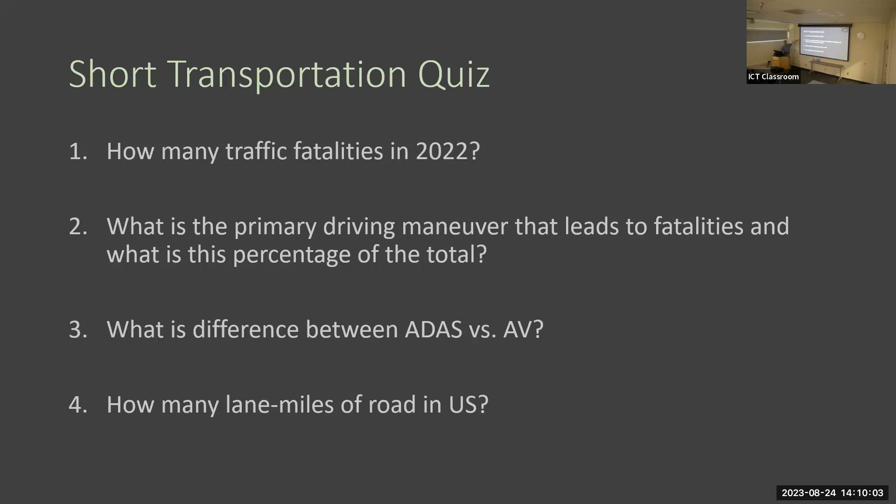And the final one, the traffic fatalities - there you go, almost 43,000 deaths per year. And the other shocking thing is 42% is in rural, non-urban areas. It's not just that there's a lot of people around - people are doing lane departures even in rural areas by themselves.

There's a big program with FHWA called Vision Zero. I thought we were down to 30,000 - yeah, it went down and it came back up. We're up, I'll show that statistic in a second, but it went down. So the funny part is, I'll hit on this right now: ever since we've had advanced driver assist systems, actually everything's gone up, more or less. And I'm not sure it's because of those things, but what's that tell you about driving behavior though?

Distraction, like cell phone use, is a big factor. How much does that play into it? Probably a pretty large percentage. Speed is also higher now.

So despite technology and FHWA's great vision, which I don't have a problem with, traffic deaths have actually gone up, even though they've spent a lot of money improving geometrics, shoulders, rumble strips, and roadside features. Yet we see fatalities moving upward, not downward.

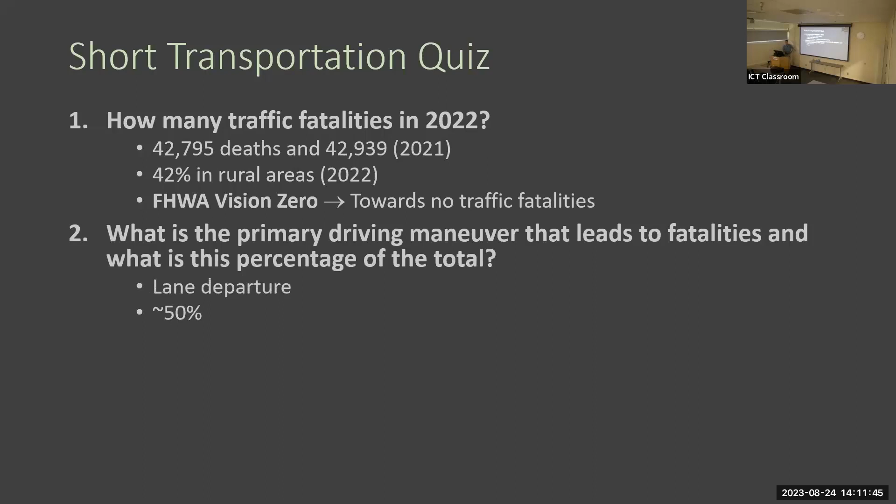We've already talked about that, and this is my definition, a subset of ADAS. Since 2011, we were down at 32,000, so things have just gone up, and we're about 20% above 2019 levels.

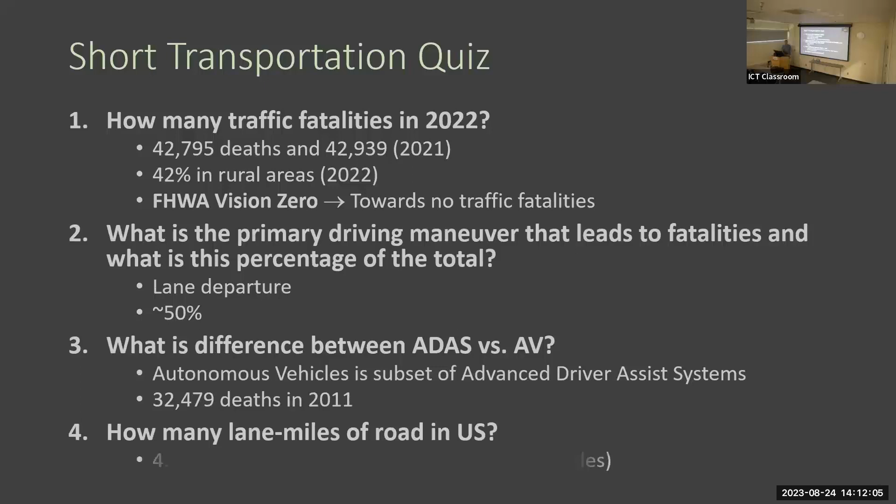Level 2 is available in a lot of cars you can buy now. We have a Subaru, which isn't a really expensive car, but you can pretty much get level 2 features on that—blind spot monitoring, adaptive cruise control, automated braking, object detection and braking. Those are all really nice. And then lane keeping is also in there. So these are what I would call ADAS systems, and there's more out there.

And then if you back up, you have the rear view camera, front facing camera, and cross traffic detection as well. I've kind of talked about these already, so I'm not going to go into it again.

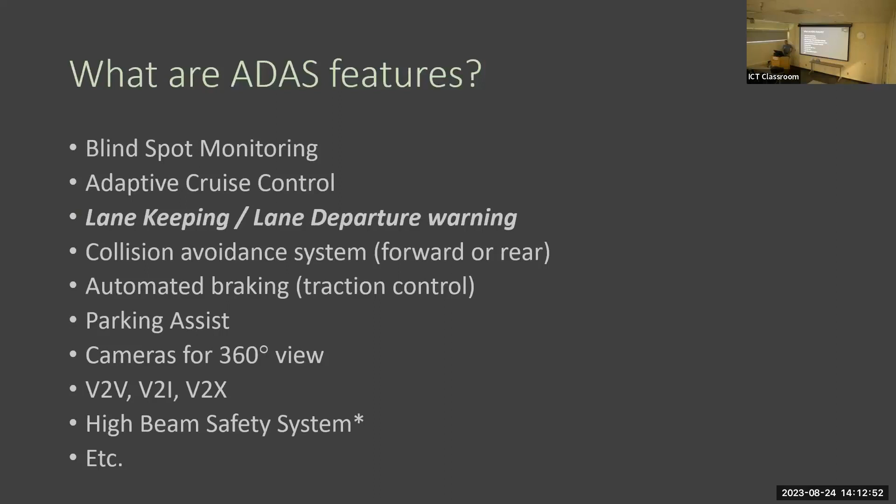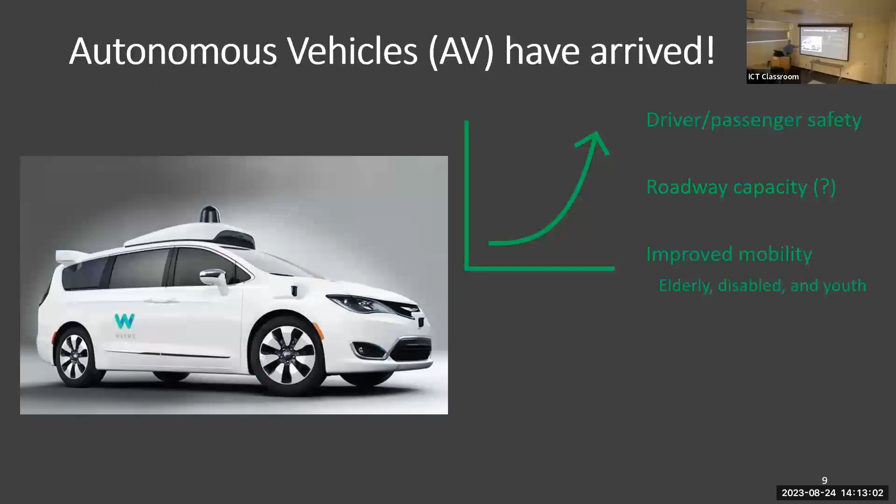And of course, autonomous vehicles get all the news, using all these sensors in a way that they can be confident the driver doesn't have to touch the steering wheel. There are all these benefits people talk about, but the talk's mostly about this being nice—maybe it isn't the next step.

We need an intermediate step potentially to make this work even better, particularly with traffic fatalities at 43,000—we're not really making a dent. And I'd say our current strategies to make dents aren't very good. If we talk about a 10% drop in fatalities, we don't even get back to 2019 levels. So how are we going to get there? What are we going to do as transportation engineers to get there more rapidly? That's the question I have.

Lane departures cause 50% of fatalities. Now that could be a drunk driver who leaves their lane, so it's complicated, but at least leaving the lane initiates a death.

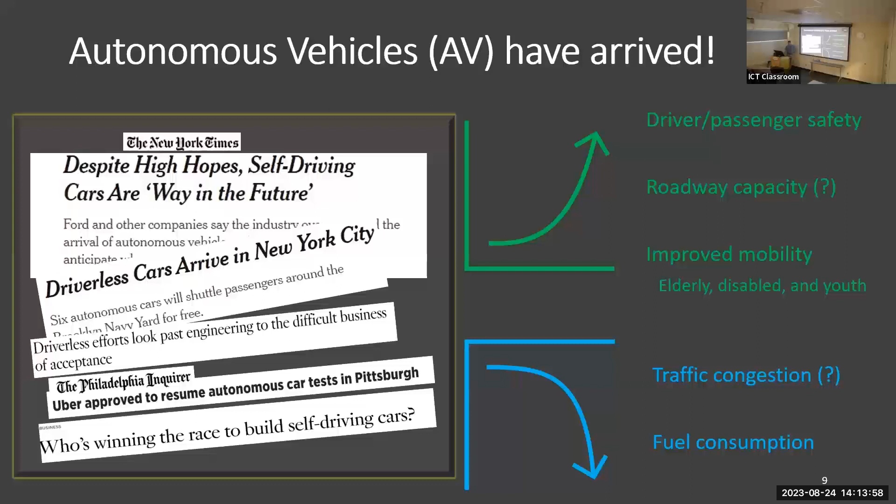So we have all kinds of sensors on cars that we're going to continue to use for safety. The question is, are we really moving rapidly to use those to keep passengers and pedestrians safe?

I'll talk a little bit about AVs since it fits in nicely. We can navigate with automated vehicles, even with non-automated vehicles—you can navigate pretty well, but obviously you can't steer by yourself with the vehicle.

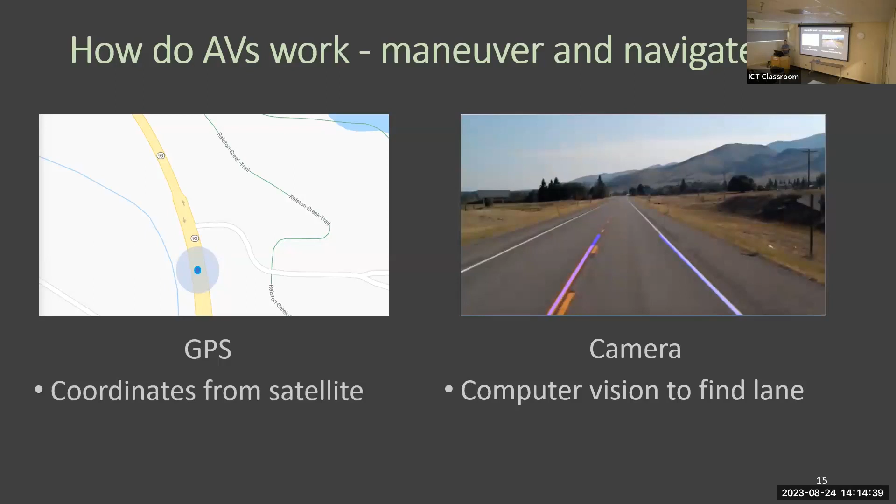One thing I want to spend time on: most of your lane keeping algorithms, as far as I know, basically use a camera stuck up by your rear view mirror. It looks forward, detects the lines on the road, and tries to keep you in between the detected lines. So obviously, if you don't have lines there or some kind of contrast, you may have a problem.

That's one of the things that came out of our geometric design class. We had students thinking, what would you do to design an autonomous vehicle road? Everybody says the road is neutral, you don't need to do anything. In reality, you do—you need very good lane markings, because that's how these systems work. If you don't have lane markings, you're in trouble.

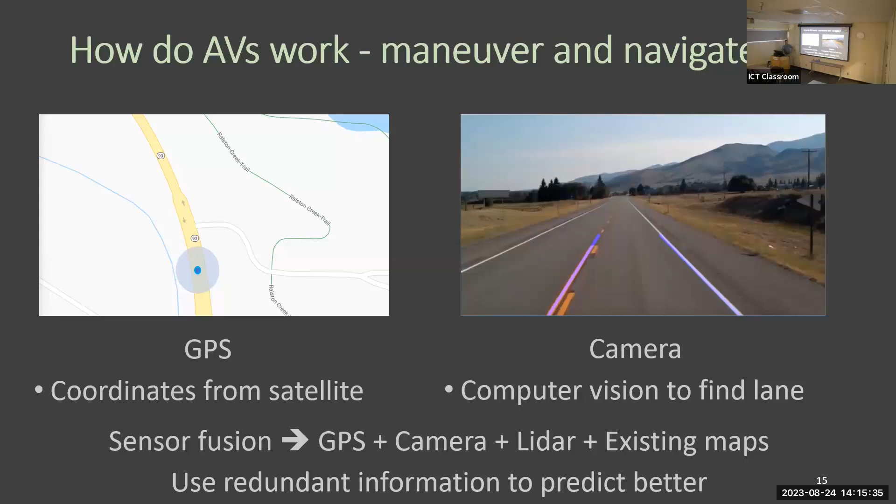So what's the problem then? Well, we could have lane markings, but we'd have to maintain them at a very high level. Remember, 8.8 million miles—that's a fair amount of maintenance. Probably good for the lane marking people.

But even snow plows can rip off lane markings, and they fade. We were driving up here with Professor Ouyang on Route 45, and if you look ahead, the lane markings disappear—the asphalt gets very light, and the markings are light enough that you can almost not tell with your own eyes they're there. So even if they're there, the contrast may not be good enough.

Now we haven't talked about bad weather. If we have adverse weather conditions, you have a very hard time detecting where you're at, the car automatically. So you see a lot of the tests that are done are in Arizona, California, where you have nice sunny days, no adverse weather, very little rain, no fog, no sleet. And that's fine, that's nice.

But this is a serious challenge if you think about the Midwest, where 33 states get 10 inches or more of snow. The interesting part, again, if you read the National Highway Traffic Safety Administration report, 75% of fatal crashes actually happen because of lane departures in adverse weather conditions. So you're kind of hoping for advanced vehicles to help you, but they're going to have problems in adverse weather conditions.

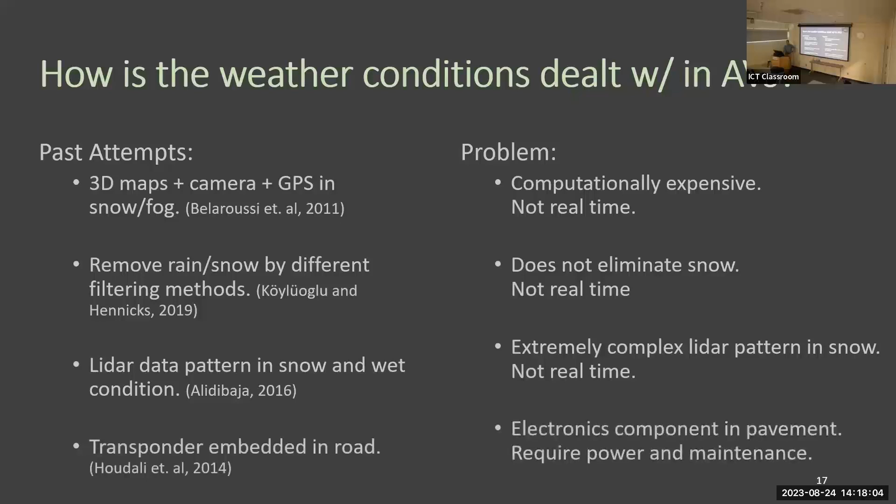There's obviously other things to do. You can build a roadside network that you can talk to your vehicle with. Maybe that'll be useful in the future for many reasons, maybe in urban areas. But in the short run, this is probably not a solution either, and it's probably too expensive. Given the amount of lane miles of road, you're not going to have roadside units for 8.8 million miles. In urban areas, I could see this happening.

So these are the challenges. I'm kind of setting up the problem here. It's taken a while that we kind of came to eventually - this took about 5 years, and I'm crunching this down to about 10 minutes. There was a problem where people say, well, we can get it right 80, 85, 90 percent. Well, that's really not good enough if you're driving, right? Every 10 miles, we have one of those miles where your vehicle doesn't know where it's at. It's probably not good enough.

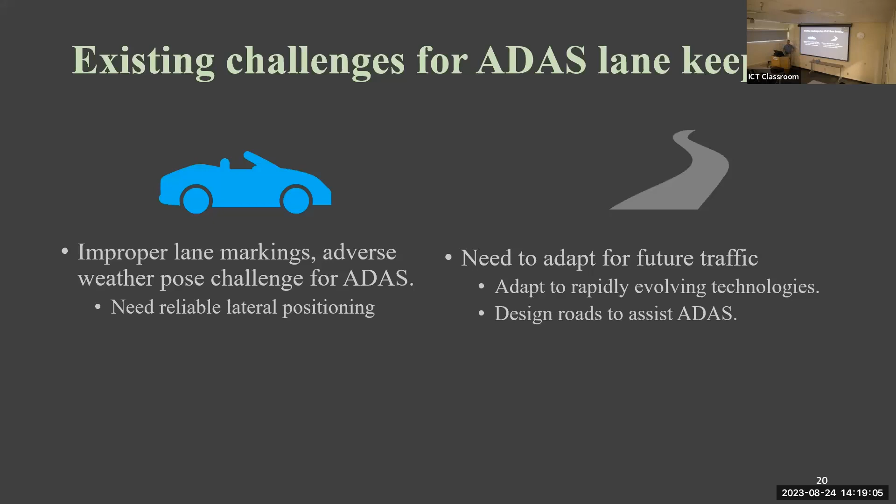So we need something that's weather independent, and so passive sensing came into play. Suchendra and I talked about this, and of course, the first thing people talk about is RFID tags and planting those in the road, and we kind of dismissed those pretty quickly because the depth - sometimes you need those, plus you still need to maintain them, plus you need to embed them initially. So you start talking about this, and it seems like it's probably not going to ever sell. It could work, but it may not be something that's efficient and easily maintained.

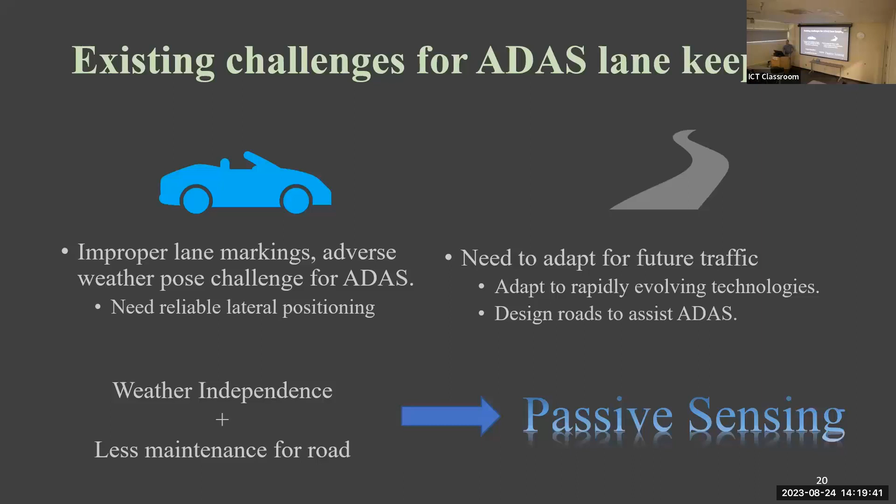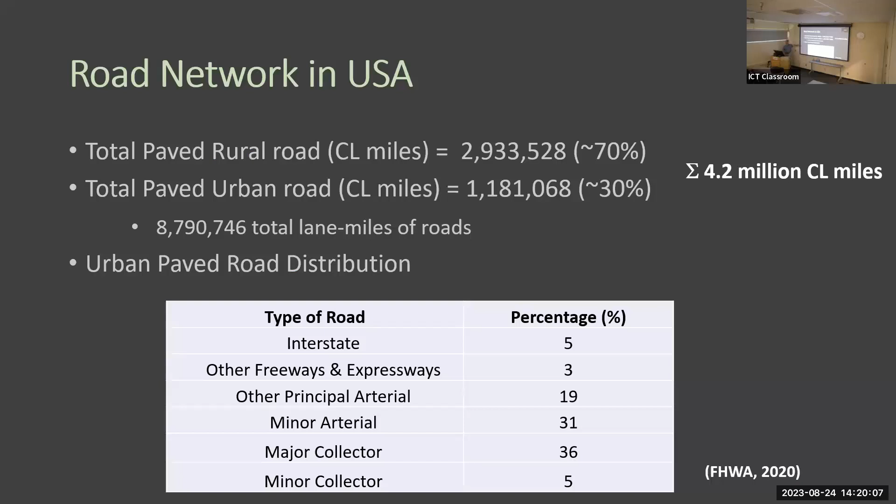Especially when you talk about where all the roads are. Really interstates would be easy since they're only 5% of the network. But when you talk about most of the delivery system and people moving around, they're in these arterial to collector, minor collector areas - this isn't VMT, but percentage of the lane miles.

So we also looked at other ideas I'll tell you what we dismissed. We thought maybe there's optical ways where we could look at certain areas of the road, change the optical properties or the way it emits radiation, and that could go with the thermal properties as well. If we change slices of the road, we may be able to detect them with IR cameras to some degree and be able to navigate that way. We kind of dismissed all those because of the complicated sensing that would need to be done, and adverse weather conditions would still be an issue.

People have looked at radar. People are still looking at radar as a way of embedding something you can shoot off in the forward-looking direction. I'm not saying this would never work, but you still have a lot of reflectors to some degree around the road. So you're going to have to deal with other vehicles, guardrails, signage that reflect signals that you're not going to be able to detect, and put yourself accurately in the lane.

Finally, we're stuck on a fairly simple idea, which is conductance. So if we can have a conductor on the slice of the road, and then we can detect that, we can just find our lateral position. And in this case, we can do it with an air gap.

So imagine if you've ever done metal detecting on a beach looking for jewelry in the sand. You do that basically in the water or on the sand, and you can have an air gap, and it'll make a noise and say there's some metal down there. It's the same idea here.

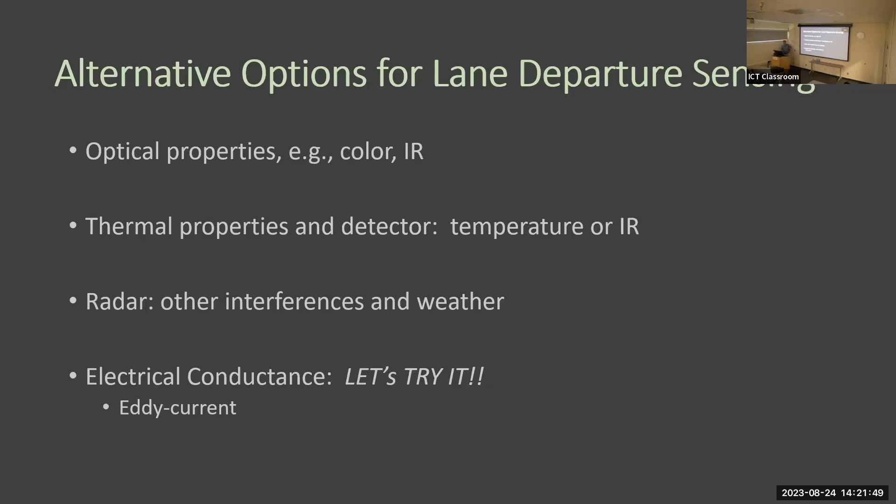So we said, let's try this. Basically, you would put some kind of conducting material, and however we want to embed it, we can embed it in concrete or asphalt. Can do it new or rehab. We had to have something that works for all the different cases, and then have a fairly cheap sensor. That's the other part - we can't have a $20,000 sensor, so an eddy current loop sensor would be pretty cheap to make, and we did that.

So the idea is you put some sort of conductor in the longitudinal lane somewhere. It could be in the center, it doesn't have to be. Your vehicle could use the camera-based system until maybe you had some occlusion where you don't see the lane lines anymore. Then this backup system comes online, and you can detect generally where you are until the camera system works again. So this is the idea we came up with.

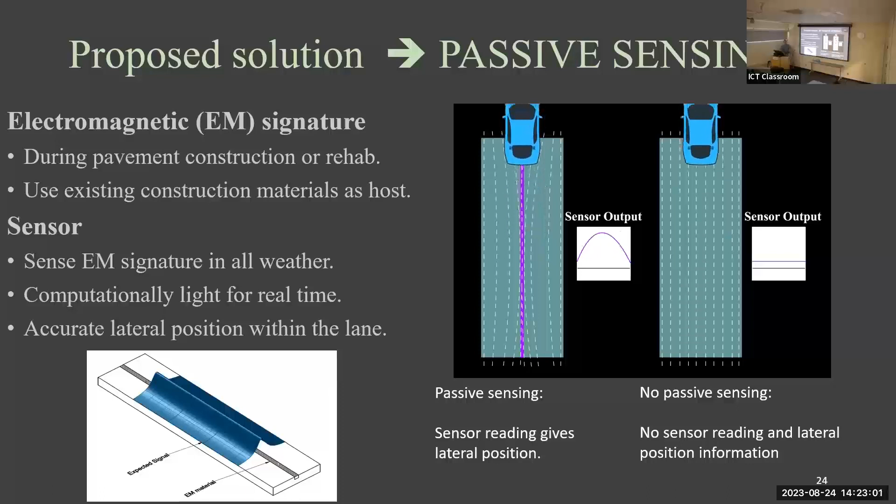And essentially in the space, you have this invisible signature that you've created. You have this conductor that when you excite this material with a magnetic field, you can then detect that there's something there, and you know the position of that.

So this was our initial take on it. Essentially, we have a high conductivity material - something like steel, anything with steel is going to conduct well. Could be other things, but that's a simple example. Generally, materials that we use, asphalt and concrete, are low conductors, so we just have to replace a small sliver of that in order to figure out where we are in the lane. I'll tell you up front that we ended up not using this, but I'll show you in principle why it's important, because then we switch to something else.

And of course, the bigger the diameter, you can detect deeper, and the closer you are, the better you detect things. But there's some trade-offs here. If you want to do better, you have to make it bigger, but then you detect everything, and that's not good either. So there's challenges with this from the start.

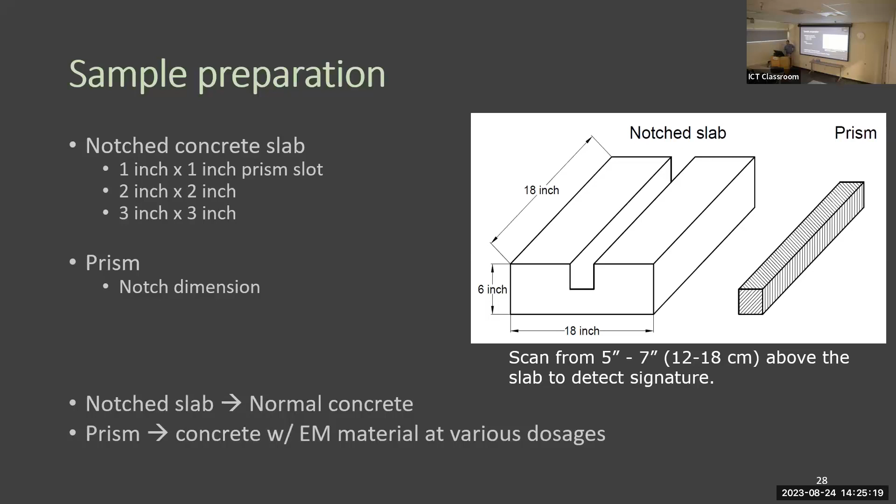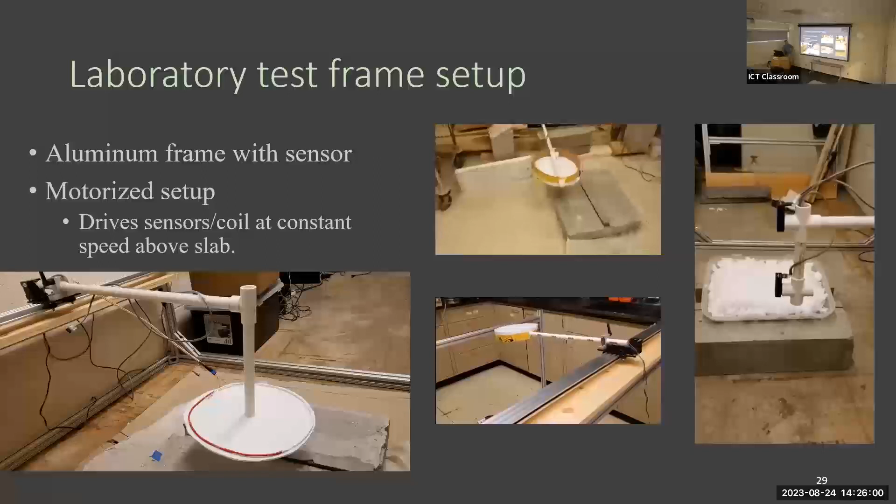This is generally how it works. You can see this would be snow, ice - we had debris on there just to show how it worked. We could then have different heights of materials, and we could have different volume fractions of materials in the road.

And so here's what we ended up finding. The green there is basically the conductor material like steel fibers, and we could put different dosages in there, for example. So this is generally what it would look like.

So your signals, even with relatively low dosages, 0.5% by volume, which is pretty much what you would normally see in concrete if you use steel fibers, you can still detect in the middle where the position of the vehicle is. Obviously, steel fibers wouldn't work very well for asphalt, so I'm not proposing steel fibers for asphalt. But if you could get a conductor to work, you could embed that in a narrow band, assuming it conducts enough.

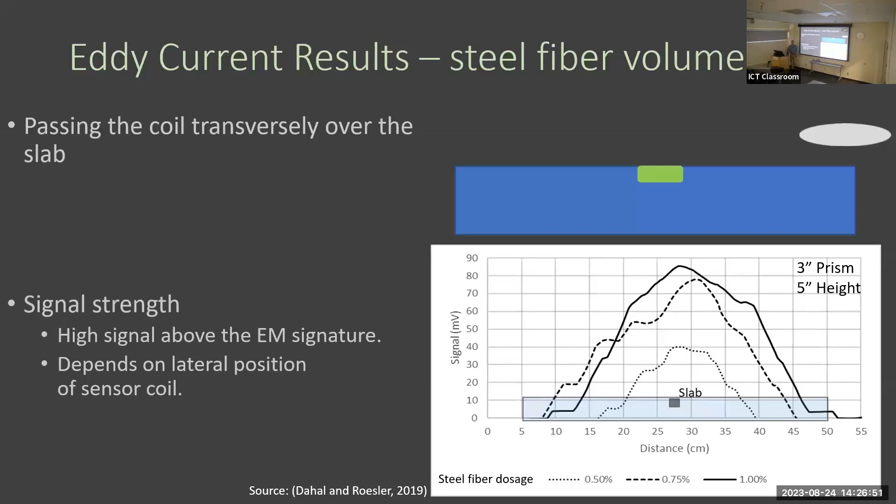We looked at a bunch of things just to get an idea of what are some of the most important factors, and obviously the height above matters. With eddy current, you need to be pretty close. The higher you get, the signal deteriorates. So that's an issue, and that'll be an issue with anything. You need to have it high enough, maybe 1 foot to 18 inches above the road.

But with the eddy current system, ice and water doesn't really get affected by it, which is good news. That's really what we want. We kind of knew that already, but we just wanted to demonstrate it.

Obviously, the smaller the prism, you have a trade-off with how small you go, what volume fraction you're putting in there, and how conductive the material is. So there's a bunch of variables in there. How much does it conduct? How big the particles are, because it has to develop an eddy current in it. So this in itself doesn't tell you the whole story.

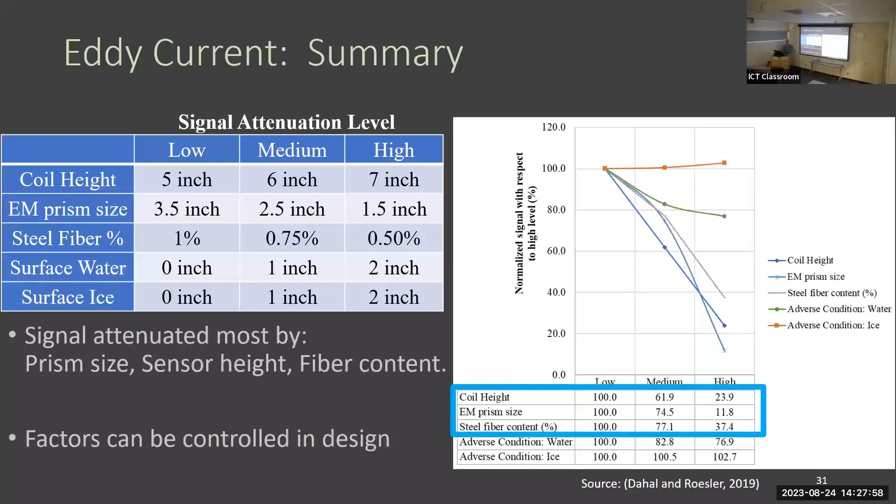But generally, the whole concept seemed to make sense. So if we get something to work similar to this, it seemed like it would be a relatively good idea, at least to complement that other system.

So obviously, cars have a lot of conductive materials. They're not all made out of plastic. And this has become a major problem. No matter what we did, we could research this for another 5 years. We would really have a hard time overcoming the problems of other vehicles, other metal on the highway, to the point where we couldn't deal with this.

So we just decided to abandon this, mostly because Sachindra came up with another good idea, which is what you expect your students to do, like the problem's still there. We need a better idea. That's what we need. We don't need, the problem's not disappearing.

And we looked in, I was a postdoc at Berkeley in 1998, and I recalled some weird stuff going on there I wasn't completely familiar with. I knew they were trying to do automated vehicles back then, and they were drilling holes into the road, and I always thought that was a bad idea. So I went back and looked, I remembered what they did.

And what they ended up doing is they drilled holes, this is a top view here, drilled holes every 4 feet, and they put permanent magnets in the road. And that was the way they were going to track where vehicles were. They had certain signatures on the magnet to tell you where you were. So it was a very nifty idea, a great idea. Maybe the implementation and the sensors they were using weren't quite ready for what we needed, but it was a good idea.

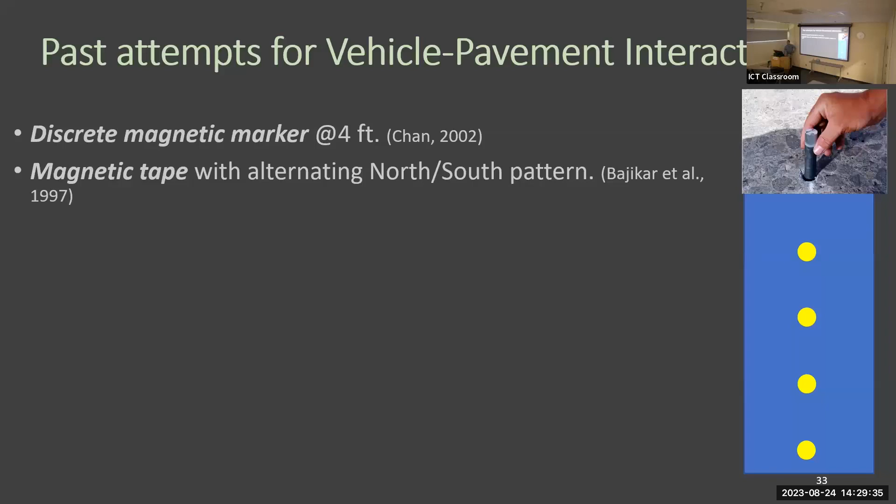And eventually this got abandoned for several reasons, but essentially with permanent magnets, you can create this signature you can pick up with a magnetometer, a magnetic sensing device. And you could also create different signatures to tell you something, like depending on how you created the permanent magnet, it could tell you, oh, there's an exit here, or there's an intersection coming up here, so the vehicle would know where it's at.

One thing they found was, the big thing here is, imagine you're drilling, you know this because most of you are pavement engineers in the room, drilling holes, epoxying things in. This could be problematic, right? They're going to come out, magnets are going to break. So these are permanent magnets, and they had a lot of issues with just maintenance. And if you think about 8.8 million miles, you don't have the capacity, you need something very reliable, permanent.

One thing they didn't do, as far as I can tell, is use these magnetic sensors to monitor the general magnetic field. If I had a magnetometer with me, I could monitor the magnetic field right here, but it includes the Earth's magnetic field as well as anything else around, any metal around here it'll pick up.

So you have to pre-map the roadway to determine the signature of the roadway so the vehicle knows what to expect. The problem is if things change in the roadway, like you put a guardrail in, or the Earth's magnetic field actually changes a little bit, then this becomes problematic. It's not a reliable signal. So that was another downside.

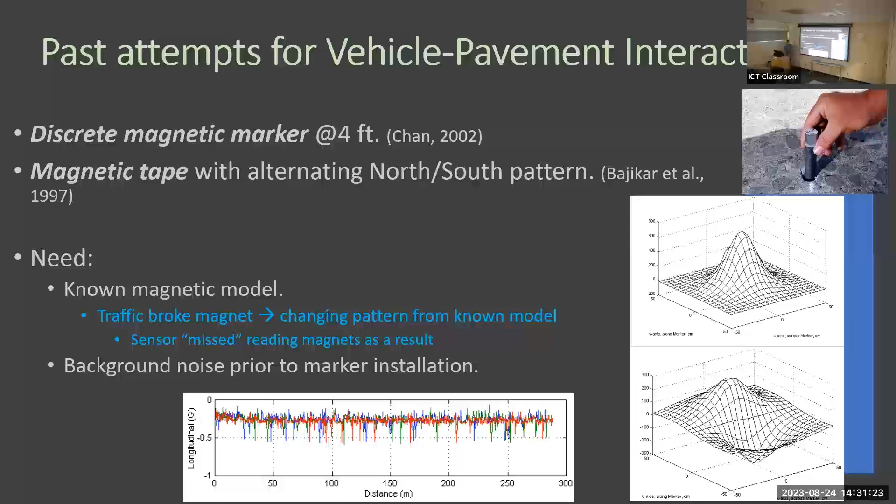They probably could have gotten around this, which I'll show in a second. But we decided, okay, let's head this direction with magnetic properties. We'll try to get materials with high magnetic permeability, materials that really change the magnetic field locally, whether it's a permanent magnet or just a material that bends the Earth's magnetic field, which is what we actually ended up doing.

High magnetic permeability materials will bend the Earth's magnetic field a lot, and then you can detect that at a much stronger signal. So steel fibers will bend the Earth's magnetic field, and you can pick that up relative to the background magnetic field that is already out there.

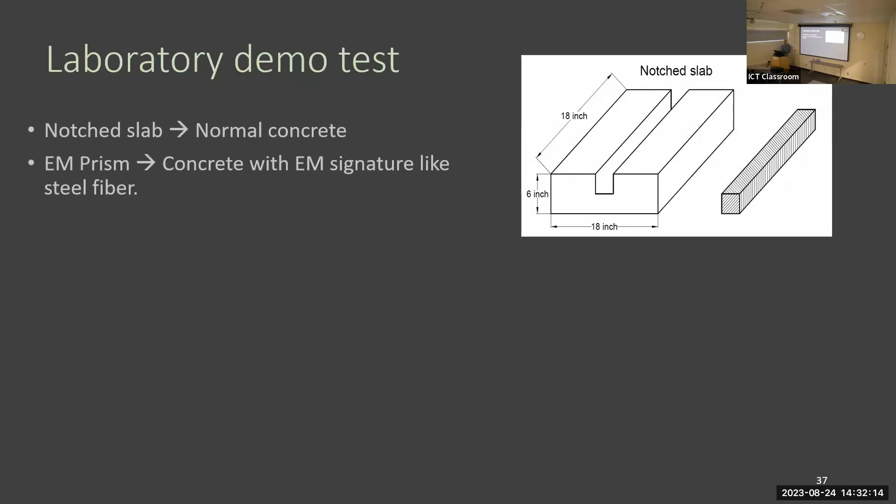If you had no fibers on the road, you'd just be picking up either something with a magnetic property in the road, or the background magnetic field of the Earth. When you put two sensors together and subtract them, you get this gradiometer effect, which subtracts out the background noise. So that's the little trick that gets rid of the background noise.

Pretty simple. Now we subtract out the Earth's magnetic field, and all we're looking for is local changes to the magnetic field intensity. Even in our lab we'll pick up the Earth's magnetic field with one of these sensors, but if we subtract the two readings, it's gone, and we're just looking at local variations. It seems rather trivial since I'm explaining it, but if we didn't do this, it would have never worked.

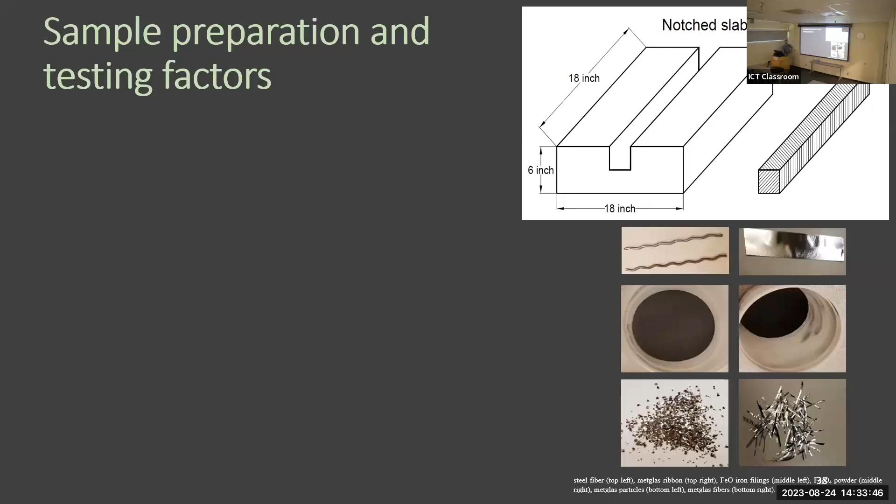So the other question was, what types of materials have high magnetic permeability? Steel, and certain types of steel do, even steel fibers, but there are other types of materials we found, some shown here. Metglas is a manufacturing material with high magnetic permeability, so you need very little of it to affect the magnetic fields you can measure. We looked at different materials we thought we could embed in asphalt or concrete — that was really the goal here.

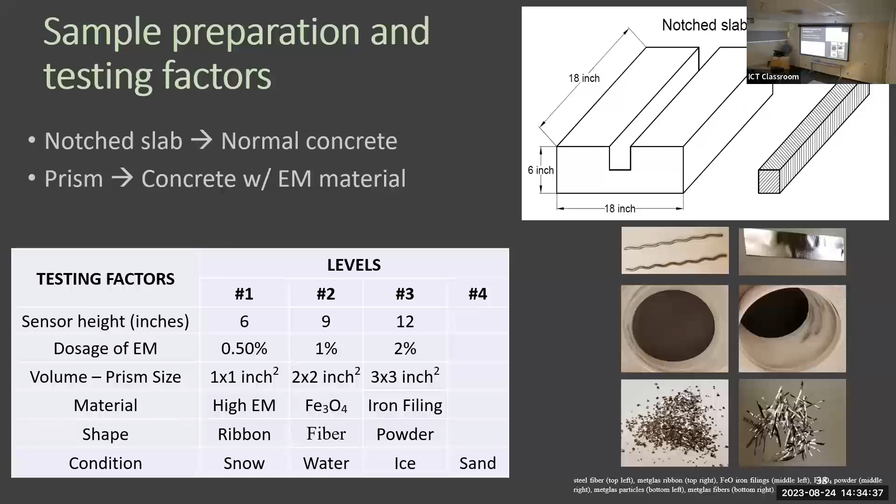We had a couple other powders, iron oxide powders, and we also realized that the shape of the material, the particle shape, affects how it impacts the magnetic field. Very fine particles weren't as effective as ones that were somewhat like a ribbon, where some of the magnetic field lines could pass through it. And then, of course, you have different sizes of the prisms.

So we basically did everything again that we did before. We looked at heights above, we looked at volume fractions, we looked at the effects. Again, ice, snow, and sand don't really affect the signal whatsoever, because you're just trying to measure how the magnetic field of the Earth is changed by those prisms — the material in between doesn't really matter.

Here are a couple examples. As you'd expect, even with pretty high sensor height — I think this was half a percent or 1% fiber volume fraction — you still get a signal, 500 nanotesla. 500 nanotesla is the unit here. The Earth's magnetic field is about 50 microtesla, so the Earth's magnetic field will wash out the signal if you don't have this gradiometer effect.

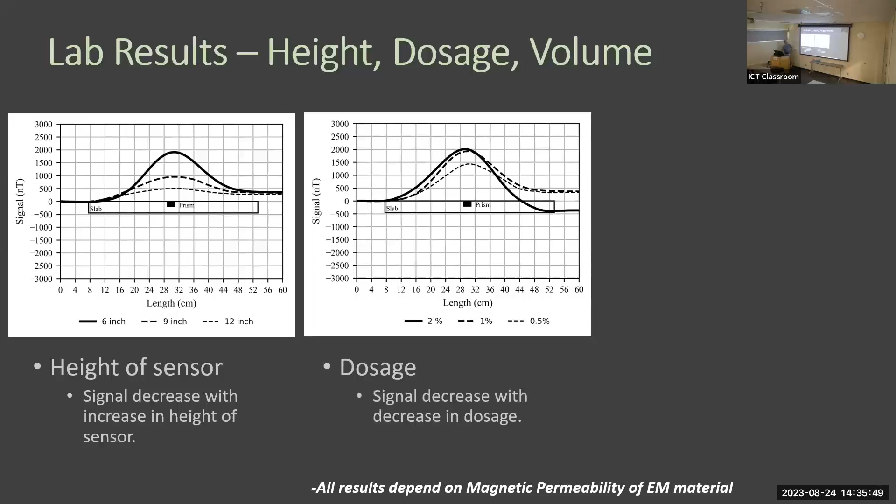Here's the effect of fiber dosages. You can see 0.5% is still a reasonable amount to put in concrete, and you can easily detect that at 9 to 12 inches above it. The last one here is looking at the size of that material — if you shrink this down into one fiber, you're going to have a hard time detecting it, so you need some volume fraction, or you need to change the material.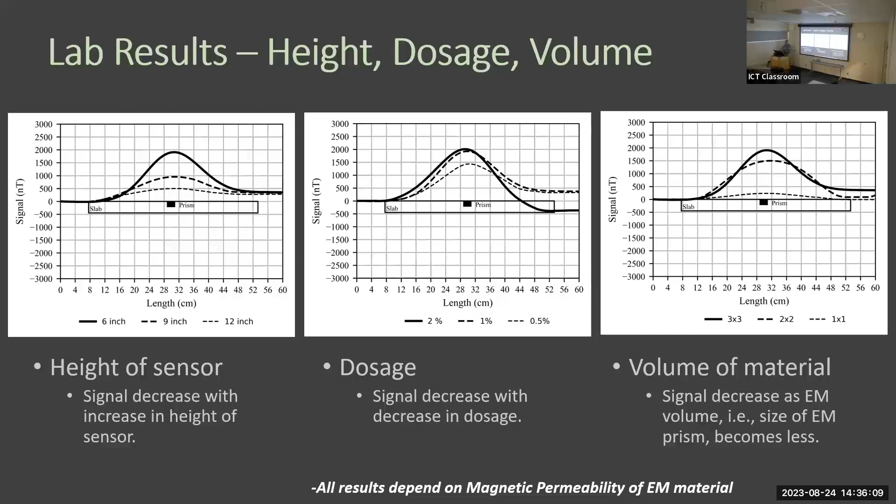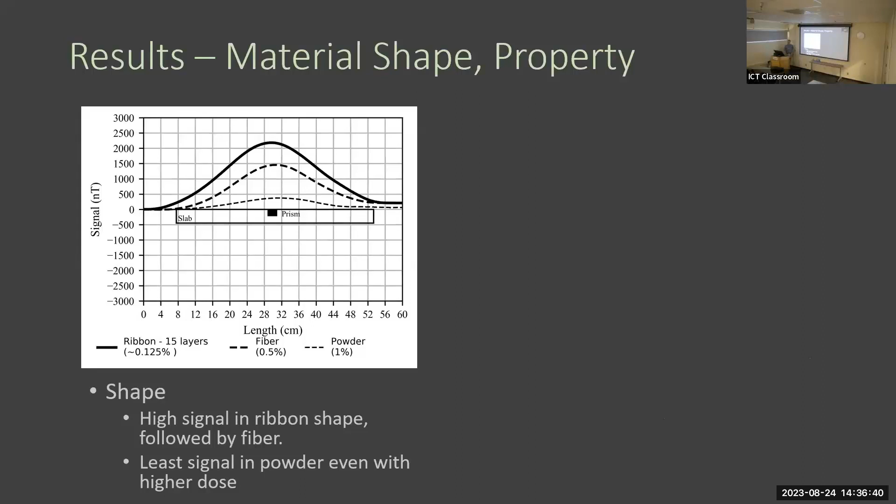That's the other side — I can change to a material with much higher magnetic permeability. Here's an example: we used this Metglas material that was used for some other material science application, and you can get very small amounts of that, not 0.5%, but 0.12%, and still get a very high signal with the right shape. Obviously this material costs a bit more than steel fibers, but the point is that if you get the right material, right shape, right volume fraction, right total volume, you can actually get this to work at hopefully a very usable amount.

And here's a few other materials. We got some powder material and iron filings. The finding here is that when you do this design, you need to have some sort of minimum signal. We came up with somewhere around 150 to 200 nanotesla as the minimum signal you'd need to detect from a vehicle. So you need a specification: if you can't get this signal level, you won't be able to detect it at high speed.

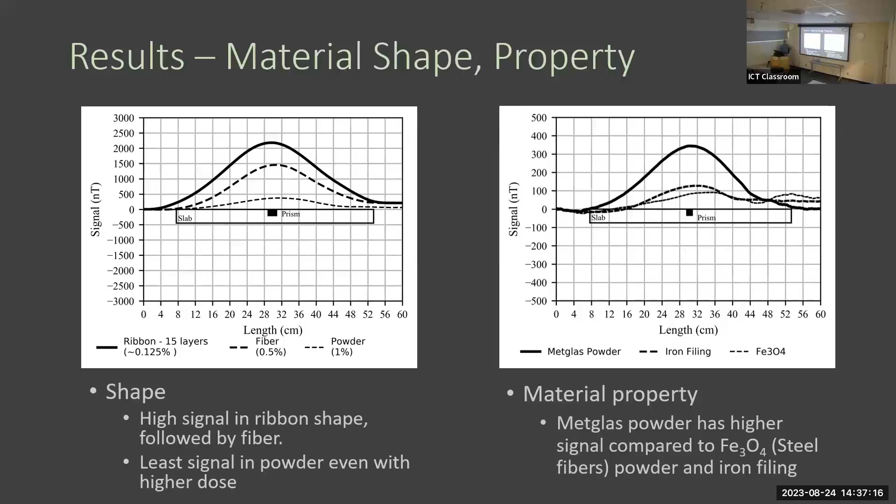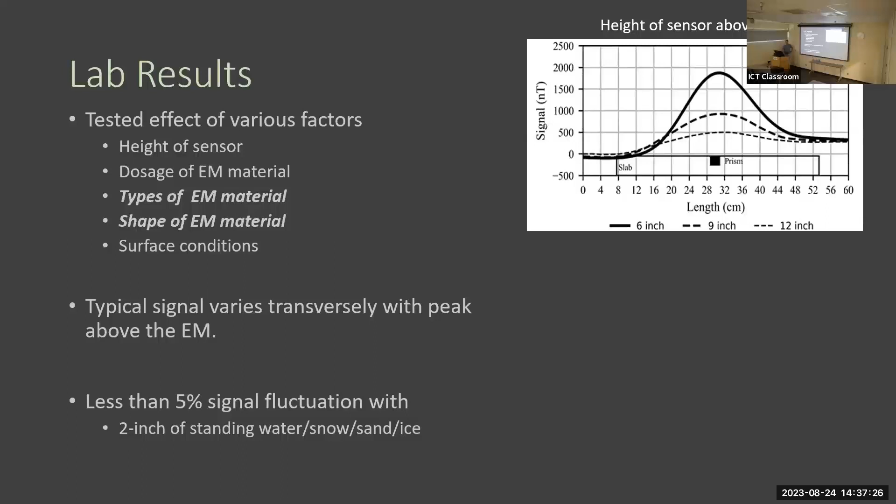Our lab results showed this seems to work. So the next step was to go outside and demo it with a simple cart. We put the magnetometers on the surface, reduced in number. We wanted to show if we had a camera-based system versus the magnetometer, could we track it with pretty good accuracy?

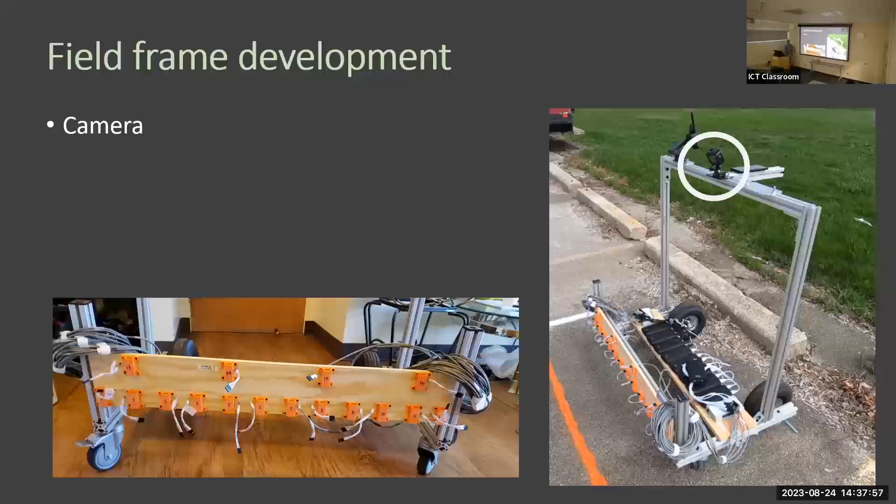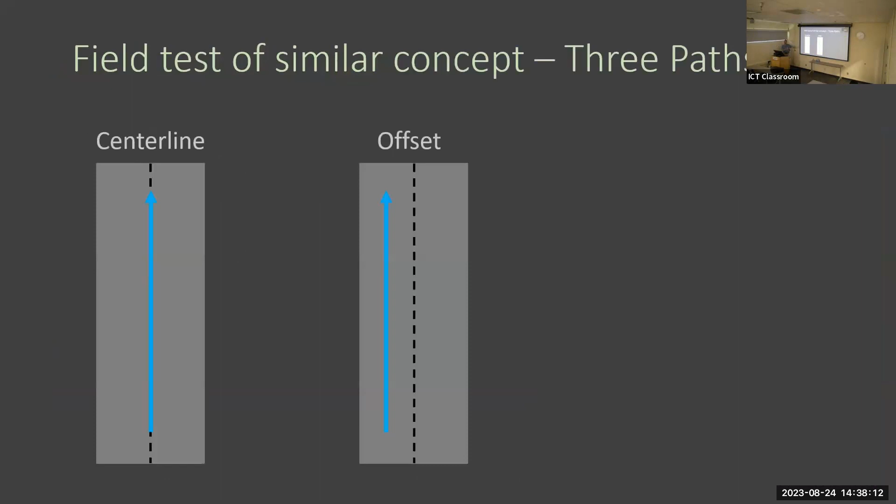This was just to verify what we already knew. Sachendra did this at a university parking lot where we pushed the cart on several different paths. We either pushed straight ahead or offset to see if we could detect being 2 inches off pretty accurately, or if we just meandered, could we figure out our path easily.

The final part of his thesis was: how accurate is this? That's not a trivial question, because you have to know where the vehicle is, even in adverse weather conditions. In the back here, you have this apron. So we set up a bunch of prisms that we knew would work. They had various types of steel or Metglas in them, and they're 3-inch prisms.

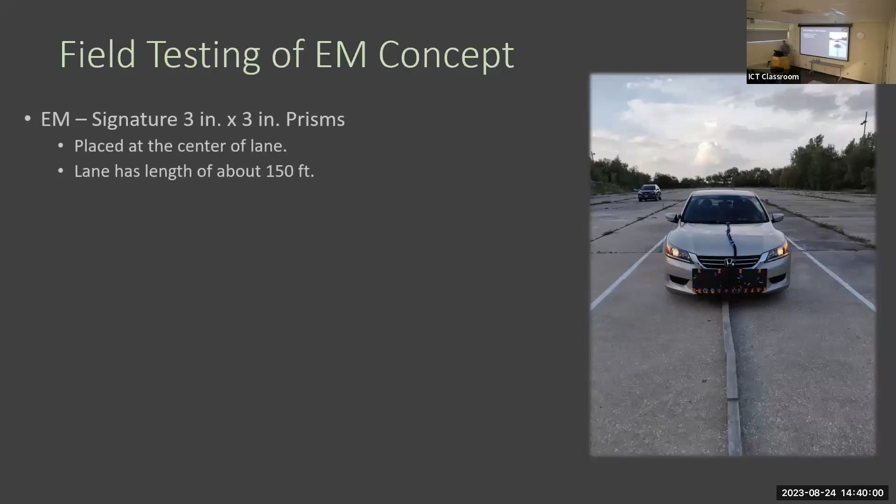It's not a hugely long test section, but it allowed us to bolt this sensor array onto Sachendra's car. This got bolted onto the front, then we put on side cameras, a bumper camera, and a front camera. That way we could track theoretically where the car was, having the sensors track where it is relative to those concrete prisms, as if they were embedded. We assumed this was embedding these into the asphalt, or actually the concrete layer there.

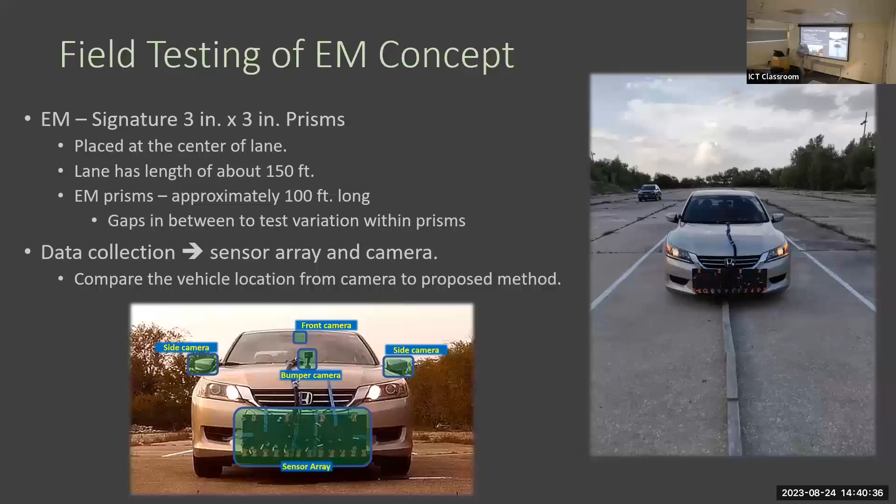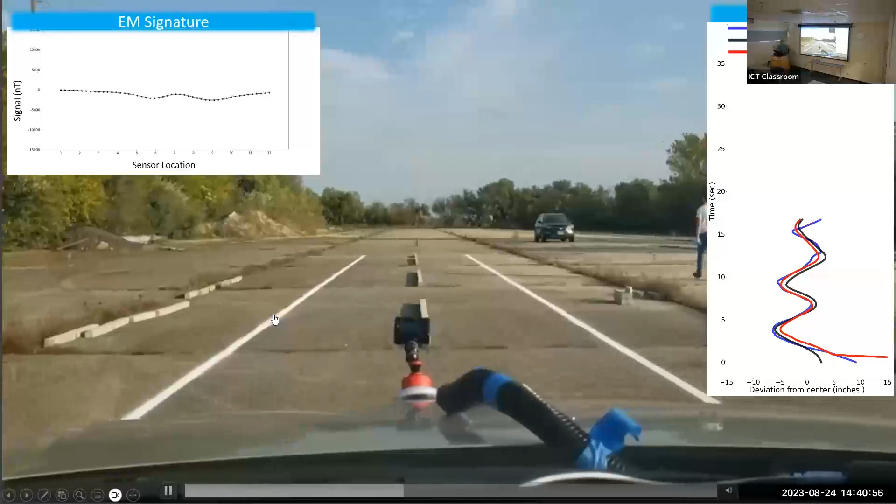Here's an example of the side cameras as ground truth. The ground truth is red, and the side cameras were looking at that white line. We had a way of knowing the distance between the camera and the white line to know what the ground truth was. Here are the magnetometers, telling you where the sensors say the car is. And here you get the front camera, which is essentially the camera you'd have in an AV, and then the magnetometers, which serve as a backup system.

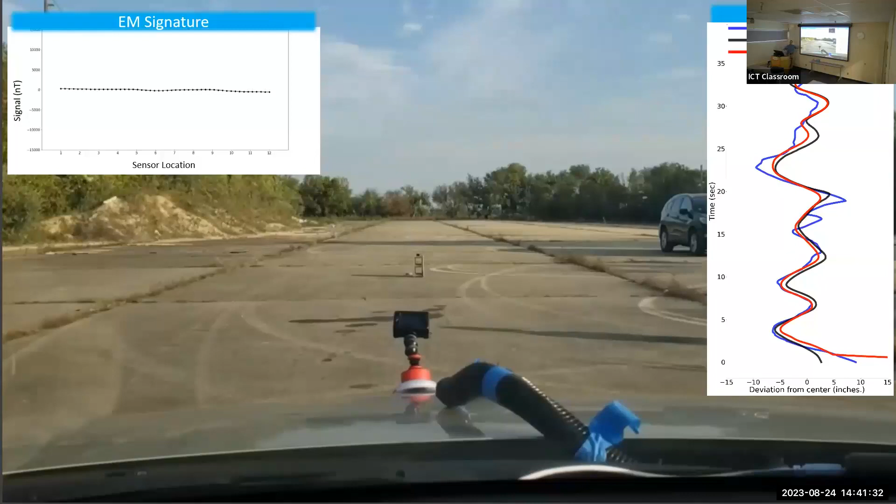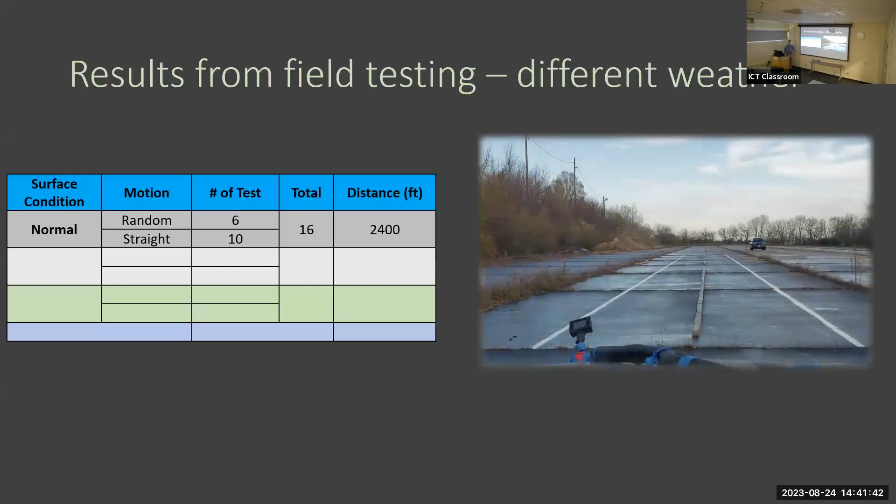So we did this for several different conditions. This is the easy condition where you have lines - the camera does a pretty good job because it can see the lines, so the magnetometer doesn't have a huge advantage here. This was the hard part for his thesis, because we had to wait till it snowed.

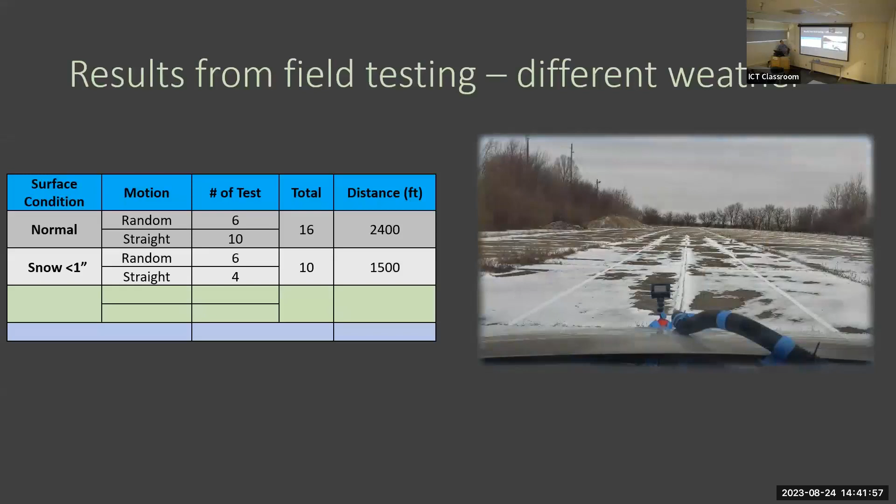Luckily, the first year it snowed, or he's been in here another year—this was in the last year, so he would have had to extend it to the next. We had normal conditions where we ran tests and got data, then one with not much snow, but a camera system has a very difficult time tracking where you are in the lane.

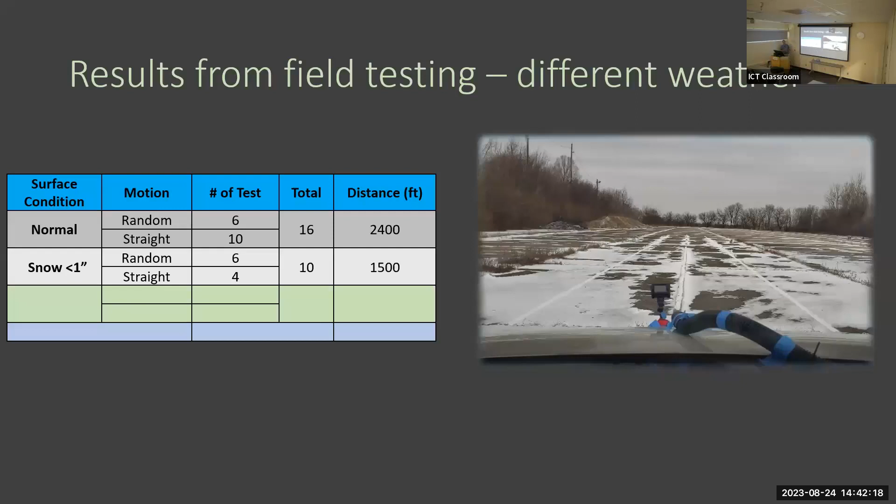And then finally we had a great day, I think it was in February when it really snowed a lot. So there are lane lines here, the concrete's here in the middle, and so can we figure out where we are relative to that concrete.

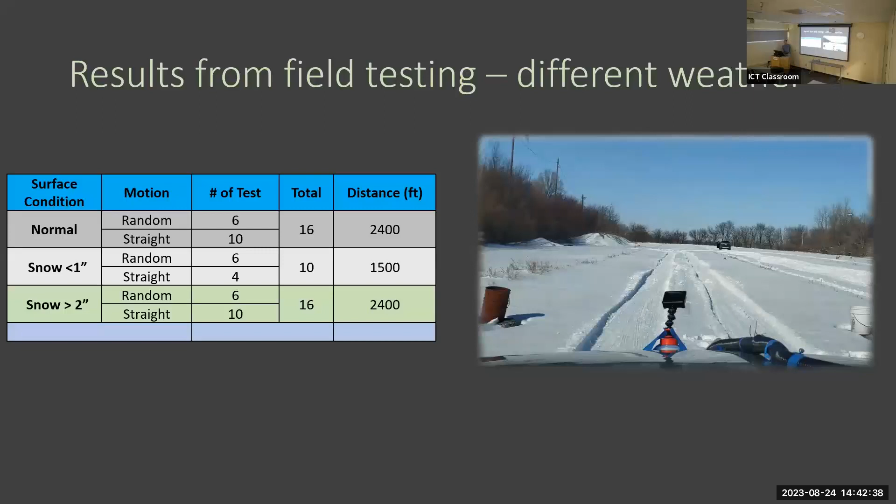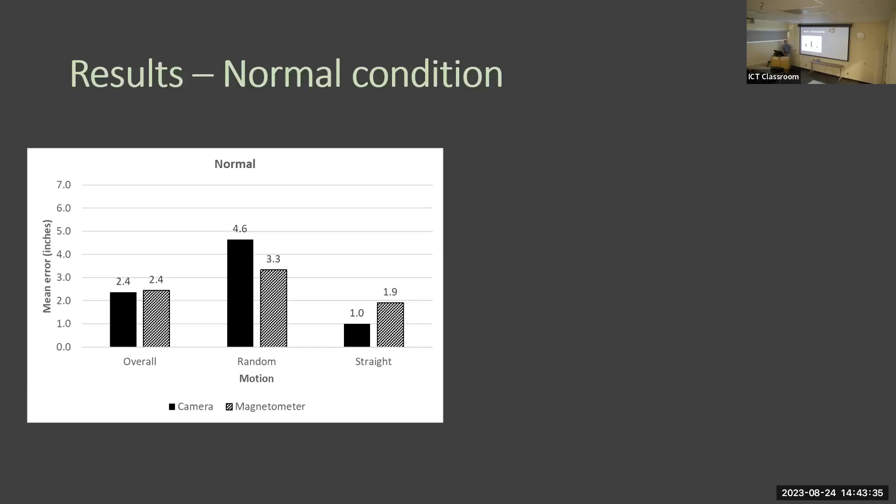Now let's go to the snow covered. Oops, wait a minute, what happened here? Oh, we skipped one. Hold on. Oh yeah, this is snow—wait, that's not snow covered.

This is greater than 2 inches of snow. There's no camera here because you can't actually detect it at all—there's no lane lines to detect. So you can see even with 2 inches of snow, you're at 2.6 inches of overall error.

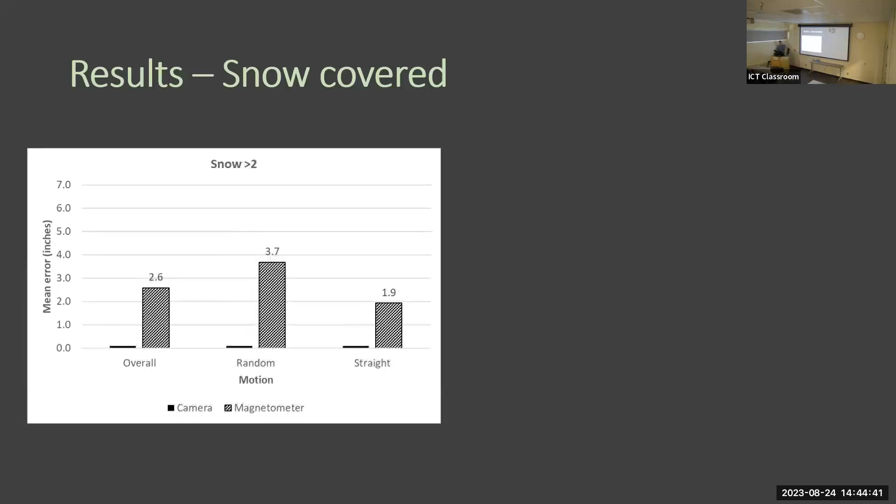And how did we know that? We put a yellow tape in the snow so we could see from our side view camera what the ground truth would be. This one here does say normal, but it's supposed to be for less than 1 inch of snow—that's not right, actually. There must be another one here. Oh yeah, here it is, right here.

Okay, running out of time here, which is good.

Hopefully what you've seen here—by the way, we're extending this to smart work zones now. We have Pete Edge here, he's working on that with the new CCAT. It's obviously slightly different than this, but there are probably questions that'll come up—there's obviously different materials I didn't show here that actually work better than steel fibers, particularly when you think about asphalt and the various applications you would use.

But the general concept's the same: you need to be able to somehow magnetize a material or bend the Earth's magnetic field in a limited area so you can detect it. That's really the intellectual finding. I think you can do this for a lot of lane miles—pretty simple, and there are many different ways to do it, not just one. So I think that's a benefit, and I get back to the safety thing.